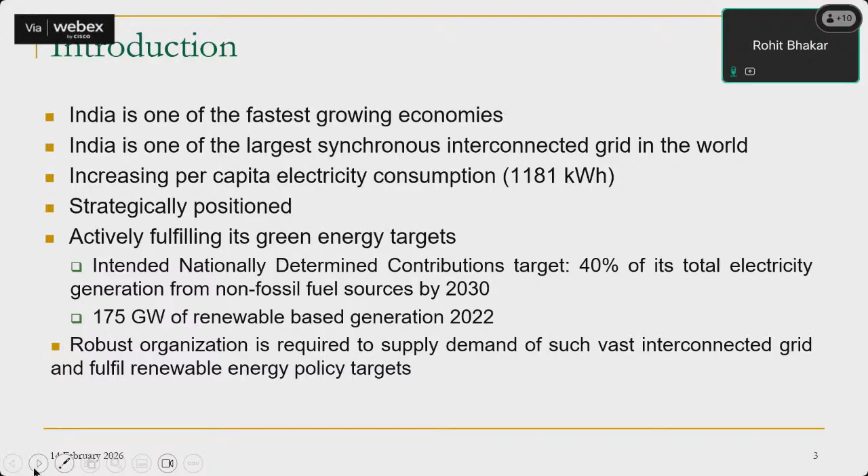The challenges that we see are because of the large size and because of the renewable penetration that we are pushing in, large requirement in the grid. There is a significant requirement to invest into the grid. Now the question is how to do it optimally. There are various ways. We could do it through appropriate market interventions, through appropriate investments into the system and through regulatory changes in the grid. So what we look forward to is just a quick glimpse of how the sector has picked up.

On the policy front, who all are the players? The central government, the Ministry of Power and Central Electricity Authority, handle the policy front, policy and planning as well. Apart from this, NITI Aayog is also part and parcel, attached to the central government. State governments do planning, a bit of policy making. On the regulation side, we have got regulatory bodies at the central level, CERC, and state levels, SERCs. On the generation side, we have got central generating stations like NTPC, NHPC, NPCIL, etc. There are mega power plants, state-level GenCos and independent power producers. A lot of those are there.

In transmission, Power Grid Corporation of India Limited is the transmission licensee at the central level. At the state level, they've got their own state transmission licensees. System operation is presently being handled by POSOCO or Grid India Limited, having entities like National Load Dispatch Center and Regional Load Dispatch Centers under its domain. At the state level, we have got the state load dispatch centers, which do the load dispatch and manage the control rooms for load dispatch.

On the distribution side, presently there are distribution licensees at the state level. The central government does not interfere much in the spectrum of distribution licensees. Trading licensees are there, those who participate in the market, and the appellate tribunal is there at the central level for appeals, not at the state level as of now. Having said that, this situation is evolving.

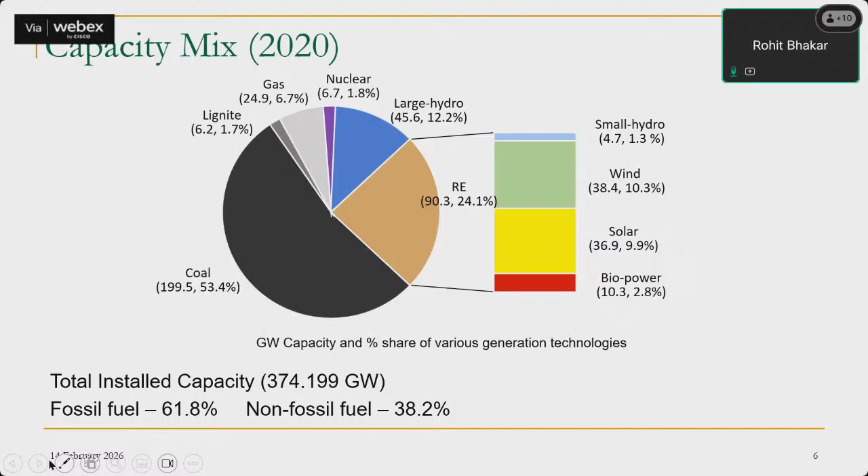Capacity mix is slightly dated, but if we go by the percentage, more or less it remains similar. RE penetration is increasing. This was slightly dated because we could not get complete details of the updated numbers. However, I'll skip this. These are slightly dated numbers.

Coming to the point, what are the challenges with RE growth? One of the key challenges that we see with renewable penetration is the relatively high investment costs involved. Obviously, when you're putting up solar generation plants, you need land. When you're putting up wind turbines, they are costly. Apart from those, one of the challenges is the present infrastructure does not have the capacity to evacuate that power when it is getting concentrated in certain areas like Western Rajasthan.

Another challenge is that these sources are intermittent, they are unreliable for secure power supply. Grid operation has to be more focused now. These are issues of major concern because monitoring and control requires a lot of effort in the present scheme of things, in which there are a large number of distributed generators in the system, so monitoring and control has to be enhanced.

The challenges that we see when we have variable renewable energy being supplied into the grid: these are non-synchronous generation systems, which requires us to focus on appropriate frequency and voltage responses in the system. Essentially, present mechanisms of frequency and voltage regulation were traditionally designed for thermal power plants, which were dominant in the grid. Now, these renewable generations are non-synchronous in nature.

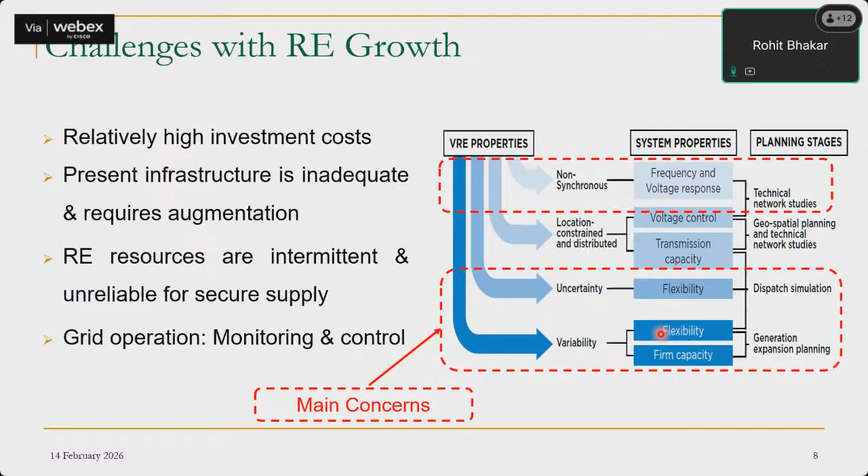So there are three facets that we'll be touching upon quickly in this session. One is on long-term system planning, the other one is on system operation, and third one is on transition towards future markets. How do we see all these issues? From system operation perspective, three issues are important as of now and are likely to be more important in the future as well. One is that of inertia and primary frequency response support in the grid. The other challenge is related to operational flexibility, and yet another challenge is related to operational reserves. These are the fundamental challenges that the grid is facing.

And some of the challenges have become significantly large, like operating reserves and operational flexibility. These two challenges have obviously become significantly large in the grid as of now, leading thereby to focus of the industry on resource adequacy studies over the last 2-3 years. So this is a segment which has drawn significant attraction in the industry.

Inertia and primary frequency response, this is yet to come up as a bigger challenge because the minimum level of operation of thermal power plants is still decent enough, and the grid is not facing challenges during those hours when the demand is there. What is happening is during the daytime when the peak demand is coming up, the solar generation is able to support it, so that compensates to a significant extent. So the challenges of inertial support are relatively low during the day hours. However, the challenges are coming up during the evening hours, but then thermal power plants and hydropower plants are able to support the grid. So presently the mix is decent.

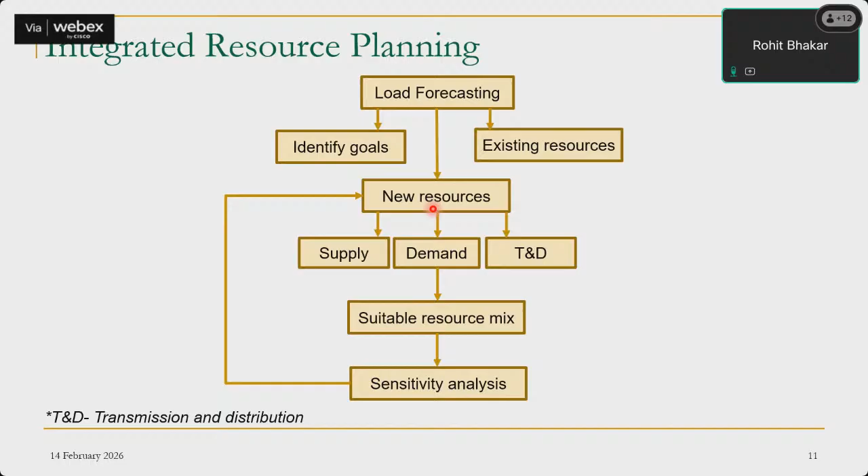terms of demand, in terms of transmission and distribution, and thereafter broadly identifying what should be the suitable resource mix that you would require to have a stable and secure system operation and planning. For that, we do a sensitivity analysis and identify which type of generation, which generation mix, which resource mix would be able to handle the system operation planning in a proper way.

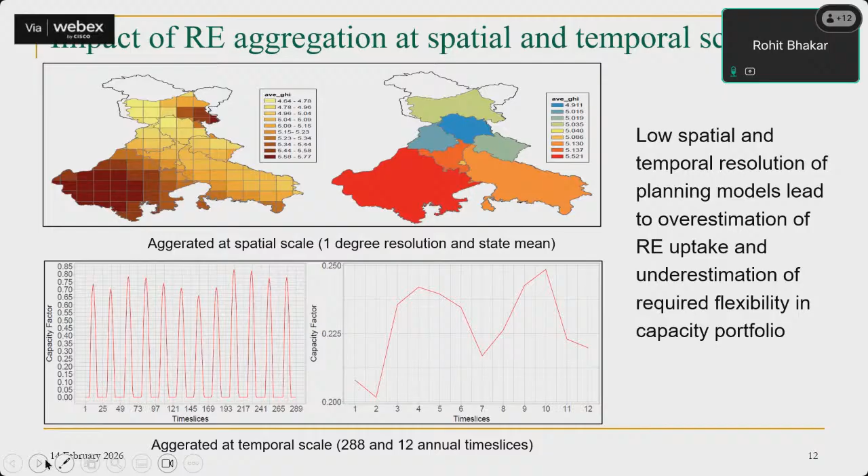From a long-term planning perspective, the challenges that we see presently, one of the broader problems that we face is when, in a very generalist mode, people say that these are the capacities of renewable generation that are coming up in the grid, we typically say the renewable generation is coming up 100 gigawatt, 150 gigawatt, 200 gigawatt. These are the terms that we generally use.

However, when we use these terms, we are not very clear on what is the time scale at which this generation is coming, what is the spatial distribution where all that generation is coming up in the grid. Until and unless we have a clarity of what is the time scale in which the generation is coming up, at what hours it is coming up and what hours it is not available, planning in the system becomes a challenge.

Until and unless we know the spatial resolution, where exactly this generation is coming up, we would not be able to make appropriate planning decisions in the system. This requires more understanding of geospatial capacities in the system so that appropriate geospatial planning of the system can be done.

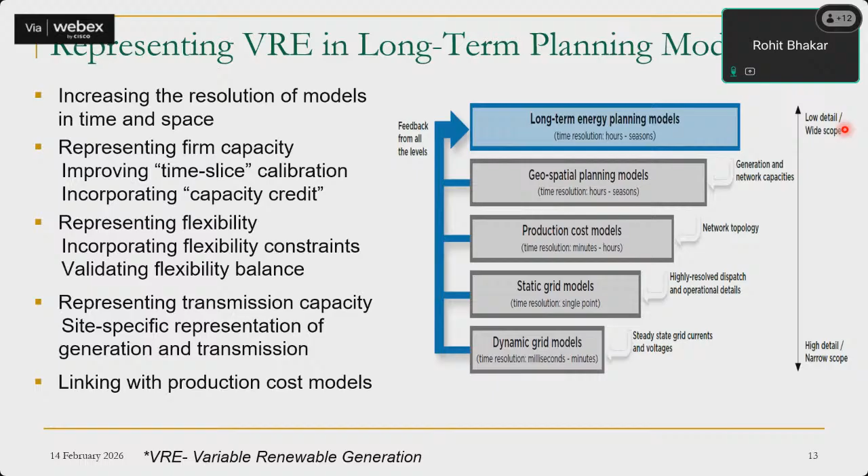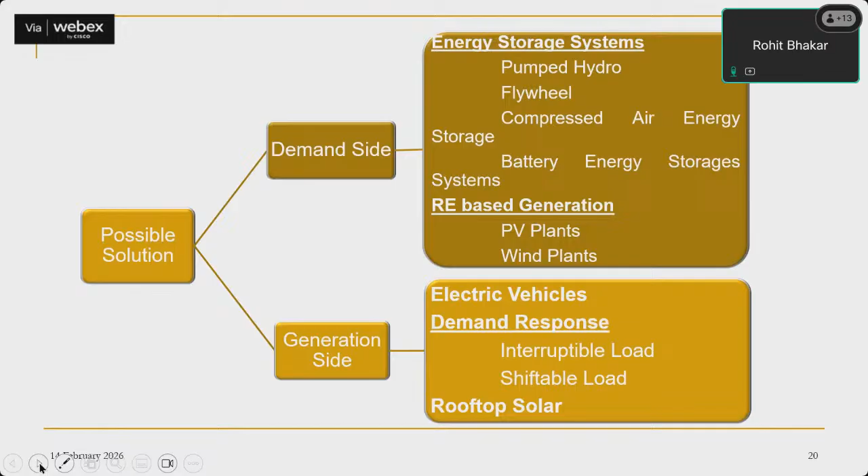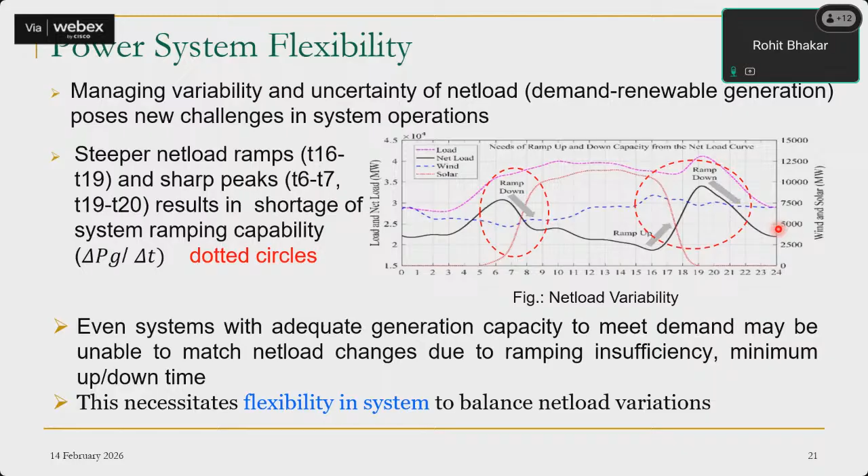Flexibility could be there in the shorter term time frame for optimal scheduling solutions, or from a long term planning perspective, in which appropriate generation mix and demand response mechanisms have to be put in place to provide those resources for flexibility. The types of flexibility that we would require would be in terms of capacities, ramping requirements, power capacity, energy capacity, and the delay in providing those services.

If the response delay is low, we presume that there is significant flexibility. If the capacities are high, we presume that there is flexibility. If the ramping limits are large enough, the generator is able to provide fast ramping up and ramping down, and we presume good flexibility. The same with capacities: whether a 100 megawatt or 200 megawatt power plant, a higher capacity indicates higher flexibility. If there is no flexibility, it would lead to renewable curtailment, load curtailment, or ramp insufficiency, which are measures of a non-flexible grid.

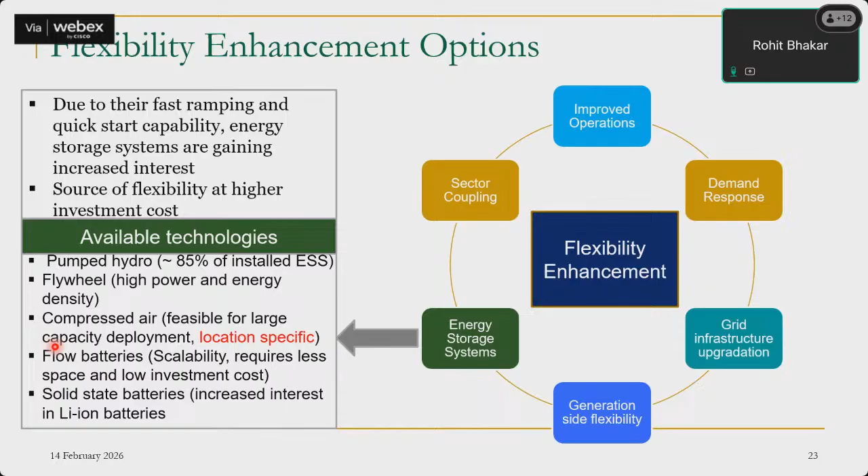So there are a variety of solutions to improve grid flexibility: energy storage, sector coupling, improved operation, demand response, grid investment, and generation side flexibility. On the energy storage side, we have pumped storage, flywheel, and other storage mechanisms. On the sector coupling side, we could bring in flexibility by integrating more electric vehicles, vehicle to grid and grid to vehicle, and hydrogen storage.

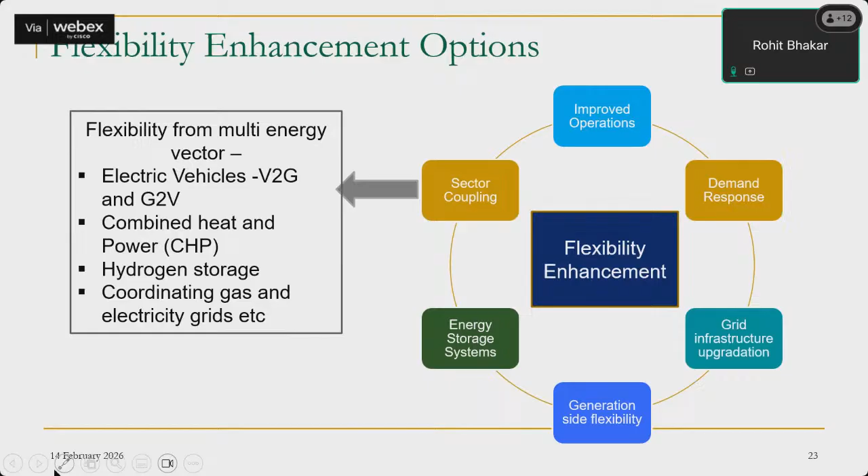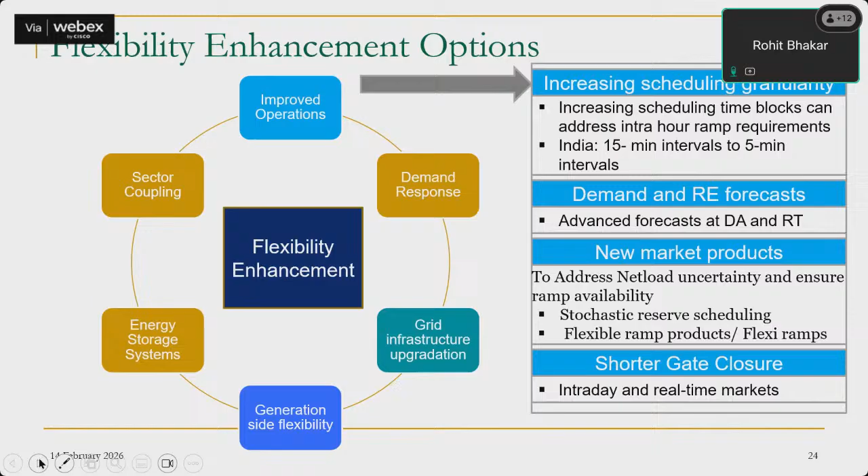These are some of the mechanisms coordinating electricity and gas networks. This could bring in sector coupling solutions, improved operations in terms of improving the time frame in which scheduling is done, having better demand and RE forecast, creating new market products like flexible ramp products and so on, having shorter gate closure for the markets. That is, rather than having a 4-hour market closure, we could do market trading in a shorter term time frame of maybe 3 hours to 2 hours, or even 1 hour for some of the services, if not all.

Demand response, which is one of the cheapest options, can be there to provide grid flexibility. The disadvantages obviously are the quantum of investment and the management required, but they are quite cheap, and it is a reliable source to provide grid flexibility. Investment obviously is a costly affair, but that is one that is presently being adopted in a big way.

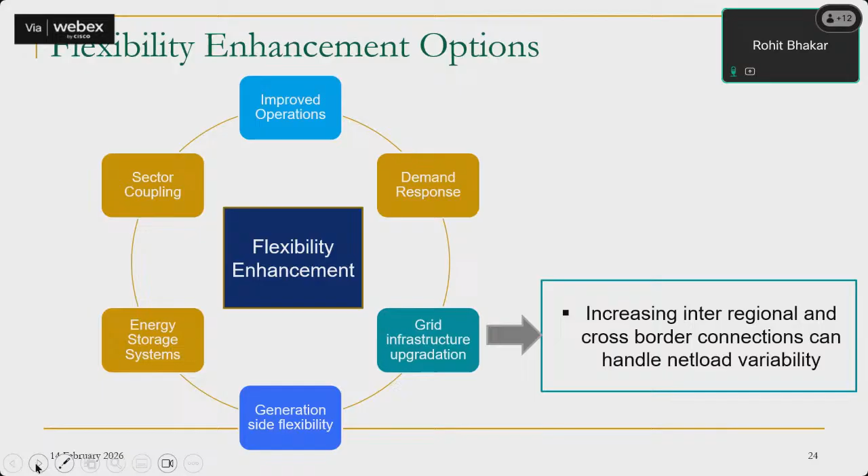Generation side flexibility can be brought in through increasing the ramping capability of units of thermal power plants, gas power, bringing in more gas power plants, decreasing the technical minimum, lowering down the minimum uptime and the downtime of the power plants, lowering of the startup and shutdown times. These could be some of the solutions to bring in more flexibility into the grid. Also bringing in gas power plants as fast response. Hydropower plants are presently what are providing fast start resources. However, gas power plants can also be brought in to bring in that type of flexibility.

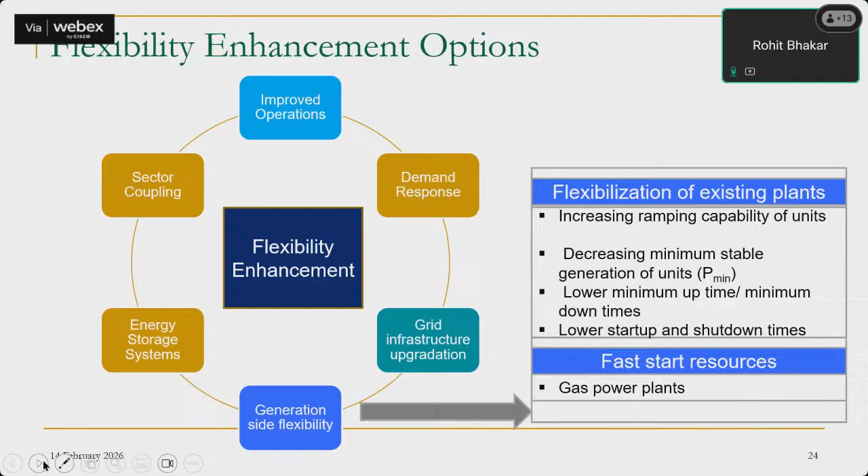Moving ahead from that, reserve scheduling is another facet that as system operators and planners we need to focus on. Because of high RE generation, reserve scheduling has to be resorted to, in which appropriate reserve planning has to be done in the grid, such that even in case of any variability, significant reserves are available in the system to manage the demand. This is obviously dependent upon good RE forecasting and uncertainty characterization of that RE generation.

The sources of uncertainty in the grid are a variety. They could come from the parametric uncertainties like forecast error, weather data error, historical data error. Temporal uncertainties could be because of data variation from one year to another year. The resources could vary. You could have a temporal uncertainty in what was the data available last year, what is the data available this year. Those types of uncertainties can creep into the system. Structural uncertainties, because we have a lack of simulations, we have lack of understanding of the detailed modeling of those power plants. Spatial uncertainties: the uncertainties may vary from one area to another area. Measurement uncertainties, which are dependent upon accuracy of the model data, which are dependent upon the type of sensors that we use and the calibration of those sensors.

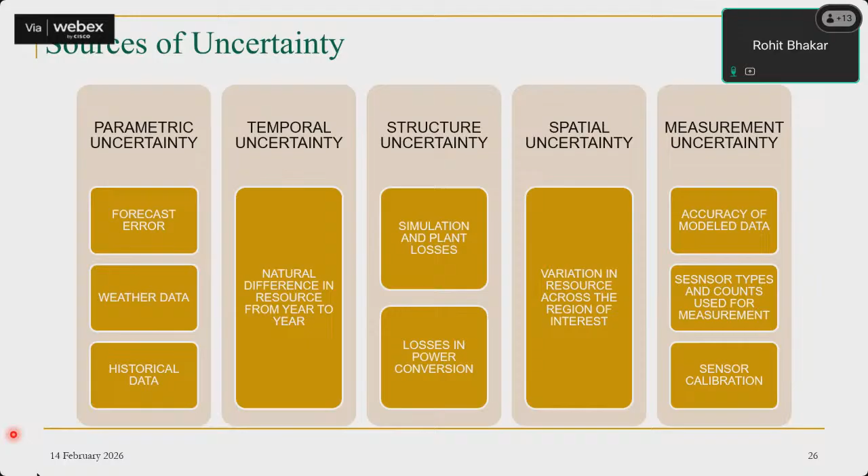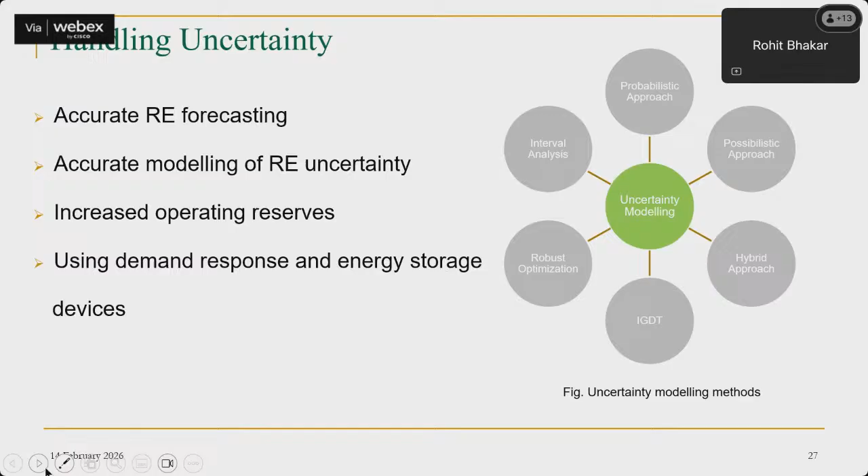Handling those uncertainties is obviously dependent upon accurate RE forecasting, modeling of RE uncertainties, and increasing the operating reserves. This is how you can handle the uncertainties, using demand response and energy storage. Energy storage is something that is presently being practiced. Demand response is something that would evolve in the near future.

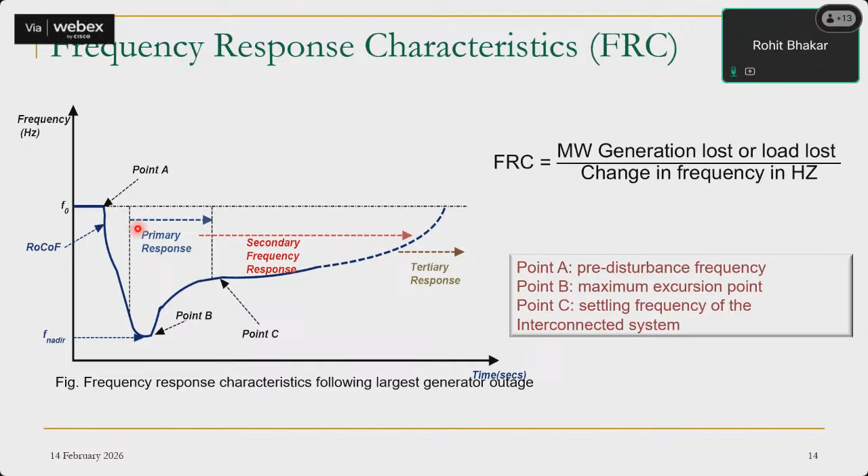So what does it mean by variation in frequencies over large time frames, like where the manual control is provided? No. The variation in frequency does not happen in a large time frame. Variation in frequency happens in a shorter term time frame. It has to be managed in a short term time frame, in this time frame of primary, secondary, and tertiary response. Maximum frequency variations can happen in this time frame.

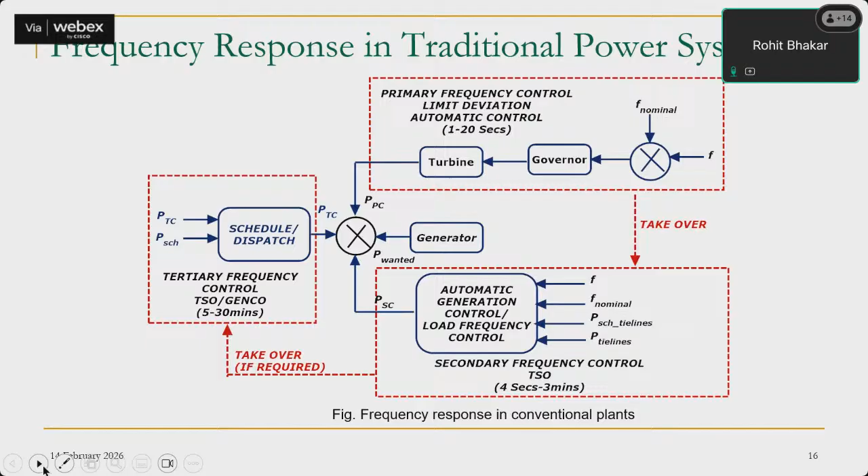However, what happens is as soon as the automatic generation control gets activated, the generation would be increased. Let's say if the frequency is going down, in that case, you would bring in additional generation through secondary control or through tertiary control or generation rescheduling. So if you get into this time frame of beyond 15 minutes, 60 minutes, obviously economic load dispatch decisions can be reworked. This is a slightly longer term time frame being indicated.

Even if you can bring in that response within 15 minutes, it is sufficient for the system. I'll show you that. Even in this time frame, it is sufficient to handle the grid variations. Frequency variations typically are arrested within this time frame, not more than 3 minutes. Beyond that, it is more about balancing the power rather than balancing the frequency. So frequency recovery typically happens within this time frame of 3 minutes or so. It does not go beyond that, usually.

Okay. You also mentioned the shifting proportions of our power generation from non-renewables to renewables. And you mentioned that inertial response is handled by the system itself when the majority of the power generation is provided by the thermal units. So in case this majority shifts to renewables, like solar and wind power generation, would there be a requirement for additional features or mechanisms in the system to address these three areas?

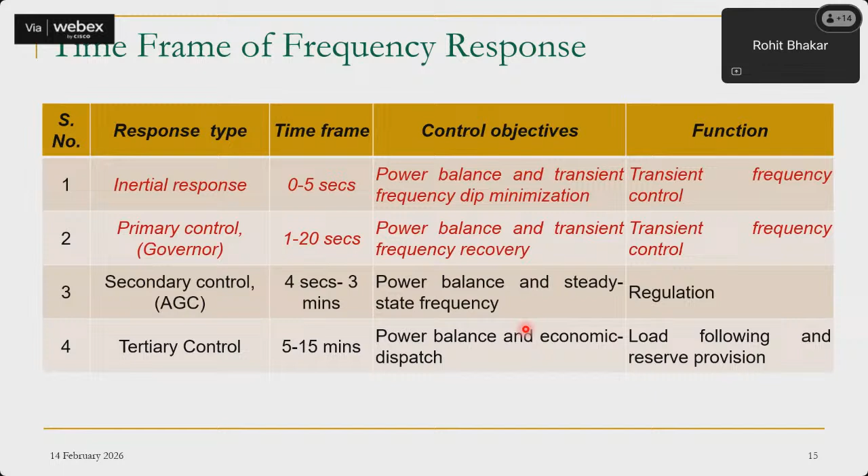I understand it was a slightly more sketchy presentation on moving from planning to operational perspective. We started a bit late and I thought of covering it in a quick fashion. However, I'll be happy to take up these points. If you want, I can respond over email or maybe in any other session. I'll be happy to answer those questions, more focused on planning studies and more focused on system operation studies, as and when required.

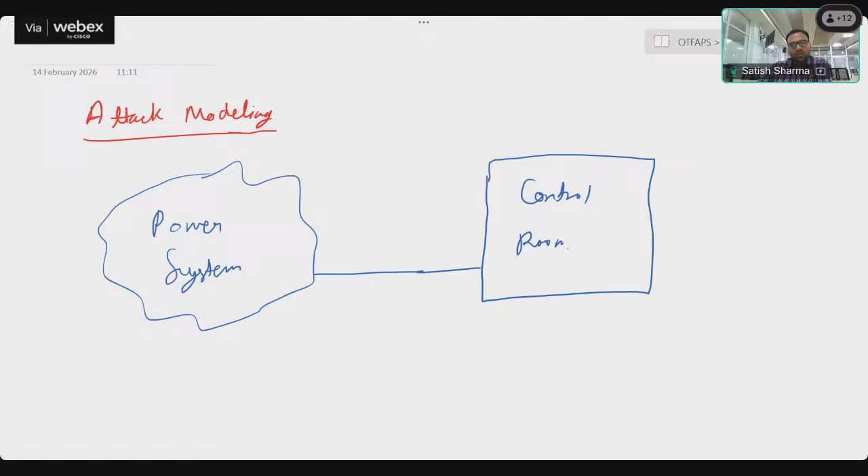So to understand some attack modeling, let's say we have a power system. In the power system we have the entire network, different loads, different generators. Some information is fed to our control room. The control room is continuously monitoring the entire power system, getting all the information from the physical power system, where it will run the system operation like dispatch related programs, and for a fault, what are the different system states. So all related information it will run.

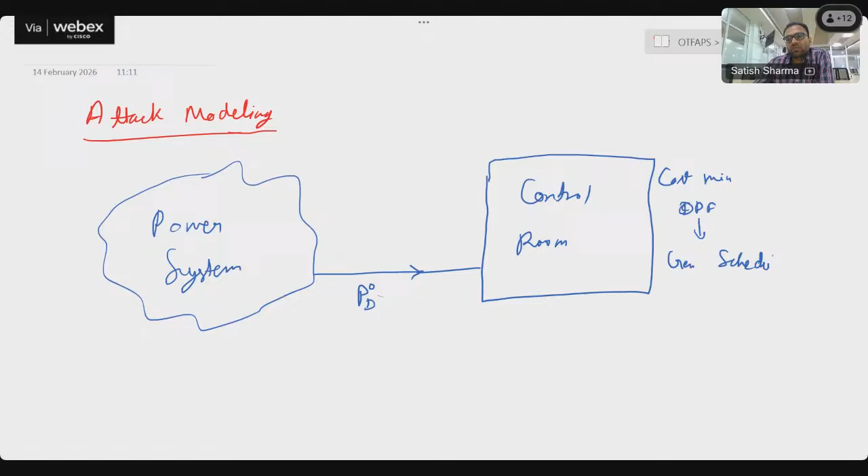So let's say I am assuming that certain demand is being observed from the power system, and in the control room we will perform some optimization, say cost minimization. It can be your economic load dispatch, or it can be your OPF. So that optimal power flow will be performed there, and you will get some generator schedule based upon whatever demand we have obtained.

So let's say PD0 is the real demand in the system, and by PD0 it does not mean total demand. It is basically the demand at each and every node. So that is PD0, and then all the different generators. We obtained a particular schedule with the help of our DCOPF or ACOPF, and we set those generators to the updated schedules. So this is the very simple schematic diagram.

Now if we talk about the attacker's point of view, there can be multiple objectives. The attacker can gather certain information, he can manipulate certain information, and there are many places where he can attack. So certain demand is observed in the system and sent over the communication channel to the control room. If an attacker comes in and modifies this demand, in the real system the demand is still PD0, but for the control room it has been falsified.

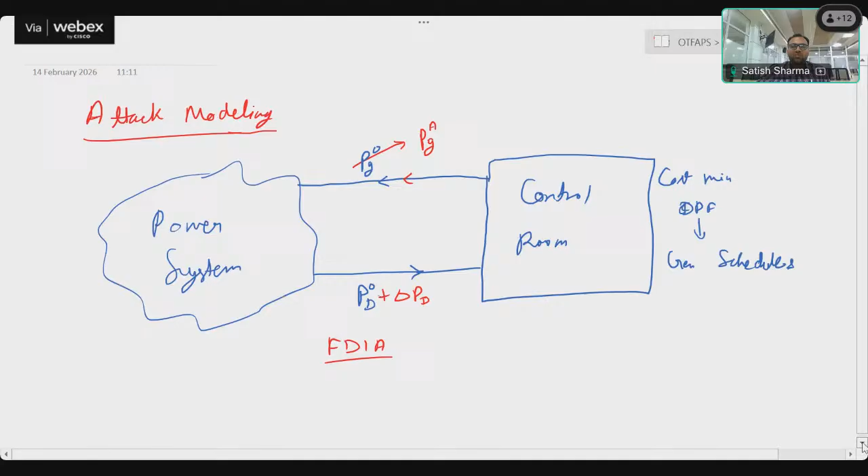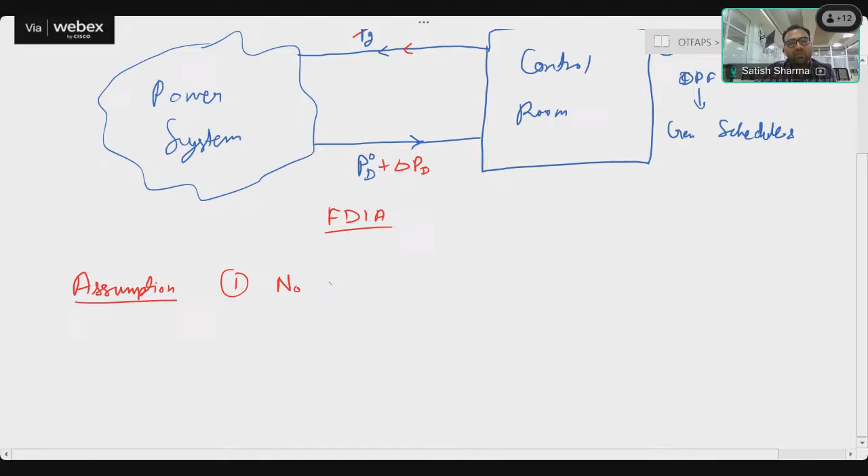So we will look at the mathematics of it, how one can design such an attack, and what information the attacker is going to need to create this kind of attack. So let's say I make certain assumptions. The first assumption, just to make these attacks a bit realistic, is that generators cannot be attacked, because generating stations are few compared to the loads. Loads are very large in number, and we generally protect our generating power plants. So we assume there can be no attack on generating stations, which is quite realistic.

Loads and line measurements are under attack. So that is another assumption, that the attacker can target load measurements and line measurements to design a particular attack. Then apart from that, to make this particular attack more realistic, another assumption is, it's not necessary, but

to be stealthy. The attacker has attacked the system; some manipulation of this particular demand has been done, and that manipulation is sent to the control room. The attack can be on the meter measuring the different loads, on the measurement units, or on the communication channel to manipulate the demand information. Now, let's say there is a load of 50 megawatts and the attacker changes it to 100 megawatts. But if it changes the load to a very large extent, obviously the control room also has its own bad data detection.

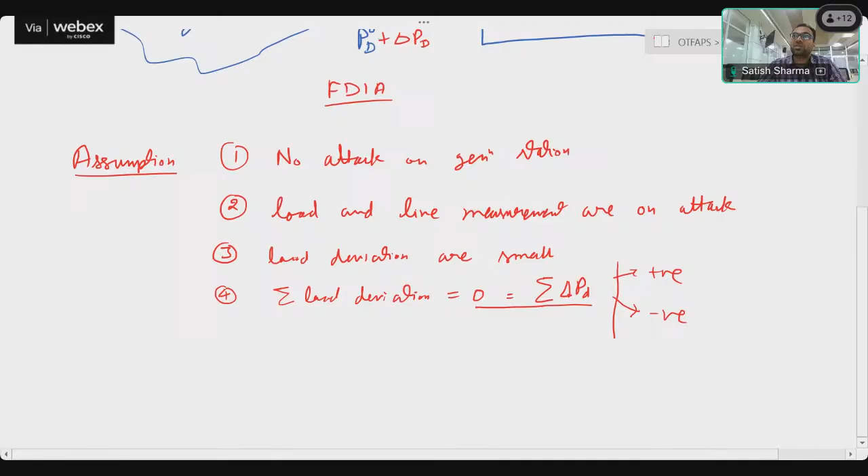So that's why this kind of attack, when the algebraic sum of the deviations is equal to 0, is called load redistribution. The attacker may increase one particular load by, let's say, 10 megawatt, and then he may decrease 3 or 4 loads to compensate that 10 megawatt. Okay, so the total deviation will remain 0. So we are basically redistributing the load, increasing one load and decreasing other loads. So these are load redistribution. If this condition is there, these attacks are also called LR attacks.

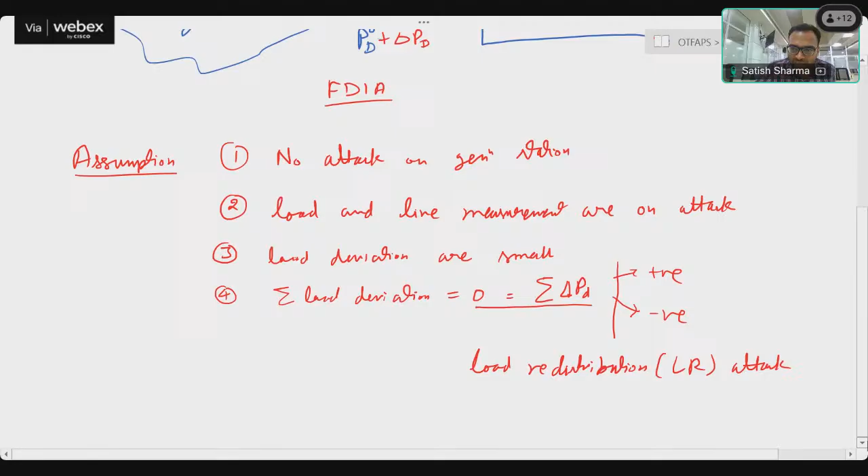Now if we look at the mathematics and how an attacker can create this kind of attack, first of all we have to look at the objective of the attacker. Okay, so what can be the attacker's objective here? Suppose he wants to attack a transmission system. The attacker can have multiple objectives. One of the objectives is to just gather information.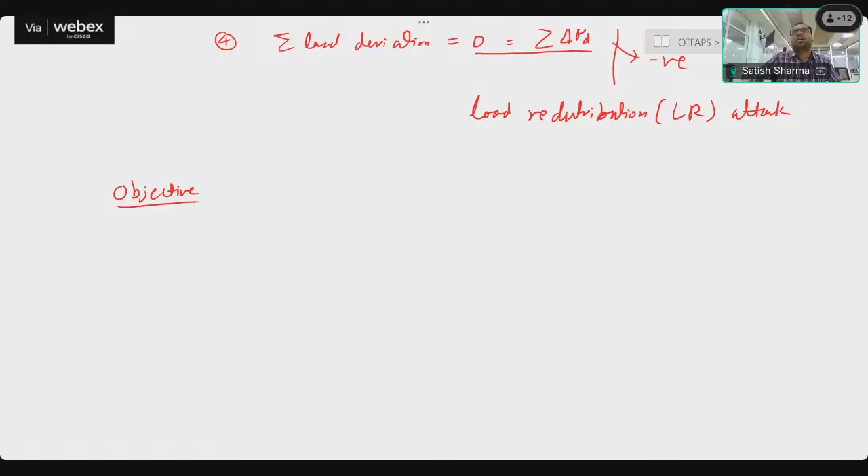So in that case he will send some spyware, and he will observe the consumption patterns and the different parameters. He will just observe everything, and he will do no harm to the system. Those kinds of attacks are generally called spyware attacks, just to gather the entire information. Once the entire information is gathered, then he will execute the real attack on the system to harm it. Then, who can these attackers be?

So let's say if we are talking about making some financial gain out of the system, the load itself can be the attacker. A load is there, and he is attacking or manipulating its measurements. So it may decrease its real consumption by increasing some other consumption, attacking the other meters of a neighboring load, to gain some financial benefit.

But if those kinds of attacks are realized, and if the deviations are very large, it's quite easy with state estimation and bad data detection techniques to identify that kind of attack, that this particular user is doing it.

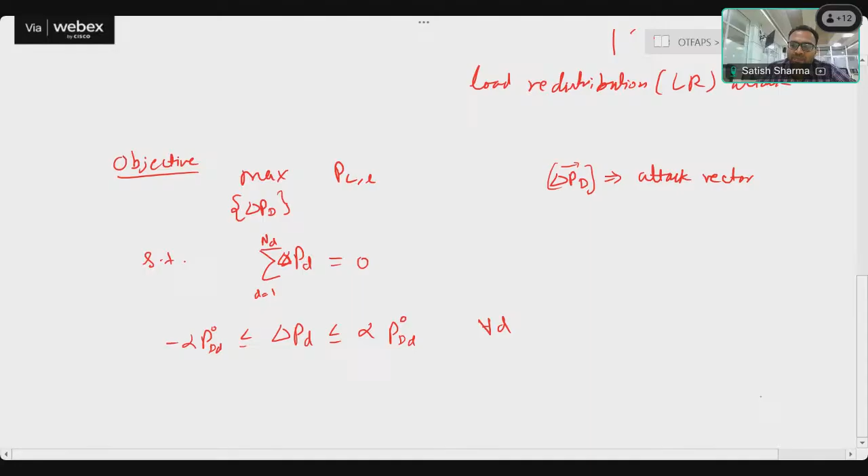So let's say once we have realized this particular kind of attack, that we have changed the load, that will change the line flow. So the line flows can be placed as the generation shift factor matrix multiplied with the power generation minus power demand. Okay, wait. This is the line flow. So this GSF is the generation shift factor.

It is defined as: if certain generation is injected at a particular node, how it is going to be distributed over all lines. So this factor gives you that. So here we are multiplying it with the generation, and that generation multiplied with the GSF factor will give you the line flows. At certain buses, generators are not there, load is there, so we can consider that the loads are negative injections and generation is positive injection.

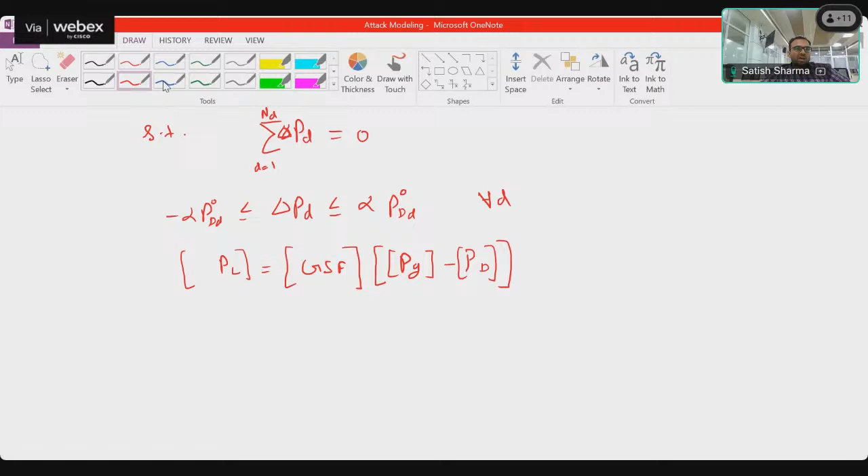So that's why I have placed it with the minus sign, that the loads are negative injections, and PG minus PD is the overall injection. And if I multiply with this GSF matrix, it will give me the line flows in the entire system. So once we have obtained this one, this is the initial power flow. So this is how we can calculate the power flow. Now I'm not going to use this particular constraint, so we will not use this one.

I can place a constant that change in load or line flow will be again some GSF matrix, and whatever change we have provided in the load. So this is what we will see, that what is the change in the load. If we are able to identify this change in the load, then multiplied with the GSF will give you the change in your system, or basically the line flows.

Okay, so these are basically one of the conditions: these are the line flows, and this change in line flow will basically be given to the... okay. Apart from that, we need this. So let's say some modified generation is coming in the system, some initial demand is present in the system, and then we have basically inserted some delta, so that is plus some delta PD that has been inserted, and if you multiply we will be able to calculate the actual line flow. So that is basically my PLL.

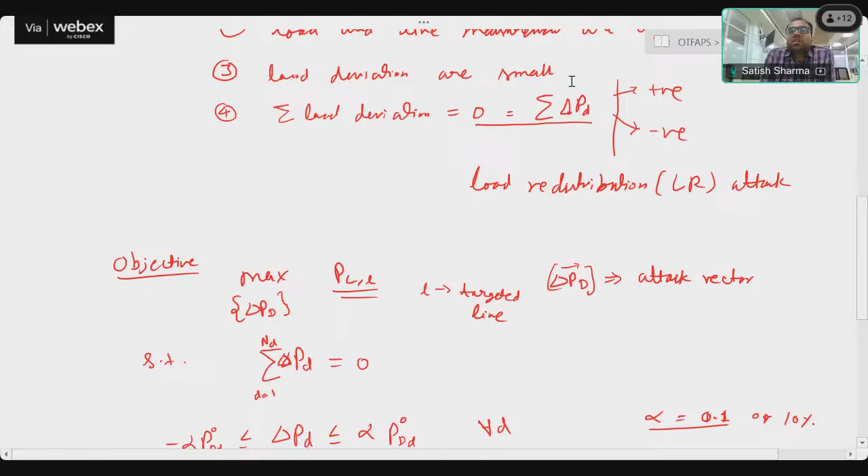So let's say if we assume that bad data detection cannot detect a 5% or 10% deviation, then we will use this alpha to decide whether the attack will be feasible or not. So from the attacker's point of view, we can do this. We can do this from the protection point of view as well: we can identify certain lines, target each line at a time and design our own attack as the system operator, and then we will know that these lines are very critical and the attacker can easily attack them by changing certain loads by, let's say, 2%, 3% or 5%. So from the protection point of view, we can identify which lines are critical and can be targeted with a very small deviation.

But from the attacker's point of view, the first line of defense is to analyze and model the attacker's behavior, like how the attacker will identify which attack he should inject. So the first line of defense is to model the attacker's behavior.

So this is what we are doing: the attacker is going to make a decision like this, that he will target a particular line, he will keep the deviations close to zero, so deviations very small. Overall resultant deviation, or the summation of the deviations, should be zero.

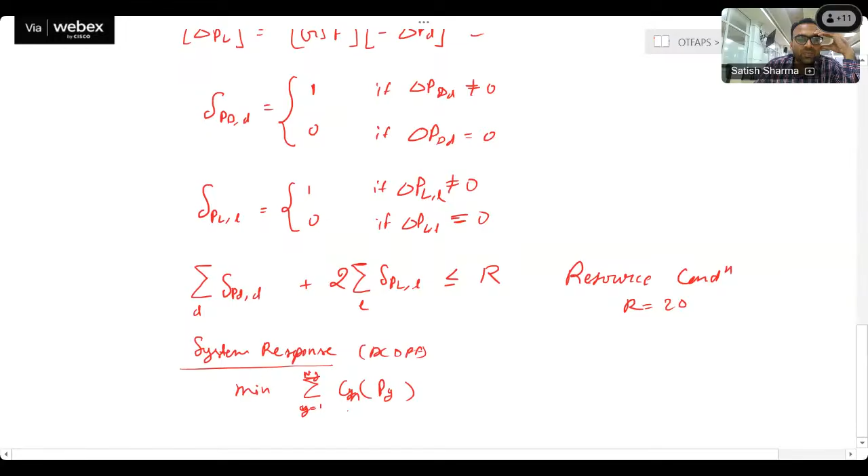Within this objective, one constraint will be the system response. So the attacker will basically model the system response as well. And system response is generally, we perform a DCOPF to schedule the generators. So I will put that constraint here: minimization of the sum over g equals 1 to ng of Cg times Pg. So this is the system response that it will solve post-attack.

The conditions here will be that our total generation, sum over g equals 1 to ng of Pg, should be equal to the total demand, sum over d equals 1 to nd. This demand has been manipulated. So this demand is basically the initial PD naught plus delta PD. So this is the total demand.

Apart from that, we have to calculate certain line flows. I will calculate the line flows from the system operator point of view. That will be the GSF matrix, and then this PG, which is the outcome of the optimization, the system operator will give you the generation dispatch PG minus

the PD naught should come here, plus some delta PD that has been inserted as well. So this will be the total power flow from the system operator point of view. Then

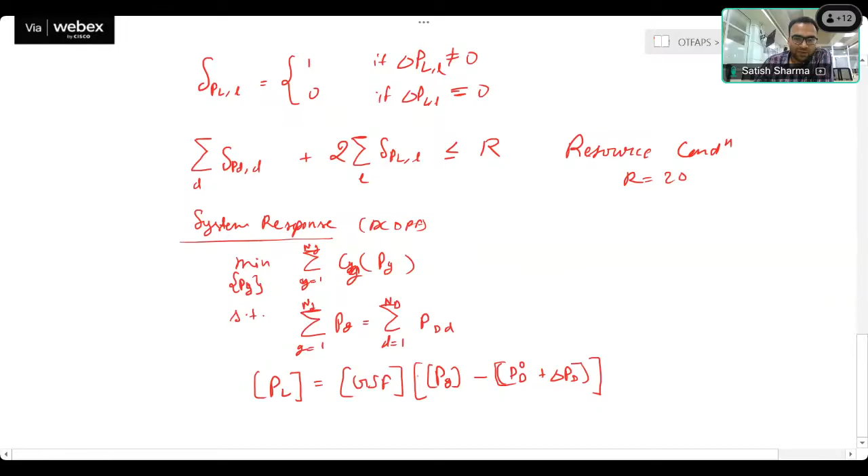further, if we see, is basically... Sir, what do the square brackets mean? It's a matrix. PL is not a single line, it's basically a set of lines. Yes. So I'm solving them in matrix form, and this PG matrix is basically generators at all the nodes.

If there is no generation, the respective value will be 0. Same goes with the demand. If certain demands are not there on a particular bus, that value will be 0. So we are writing it in a generalized way. These brackets are basically matrices; these are vectors, not a single entity. Here I have placed the individual demand.

So once we have obtained this one, we can write that this PL vector will have a certain maximum limit, PL maximum, and a certain minimum limit. What will be the minimum limit on the line flow? 0? No. Minus PL. Yes. So it will be the same maximum but with a negative sign.

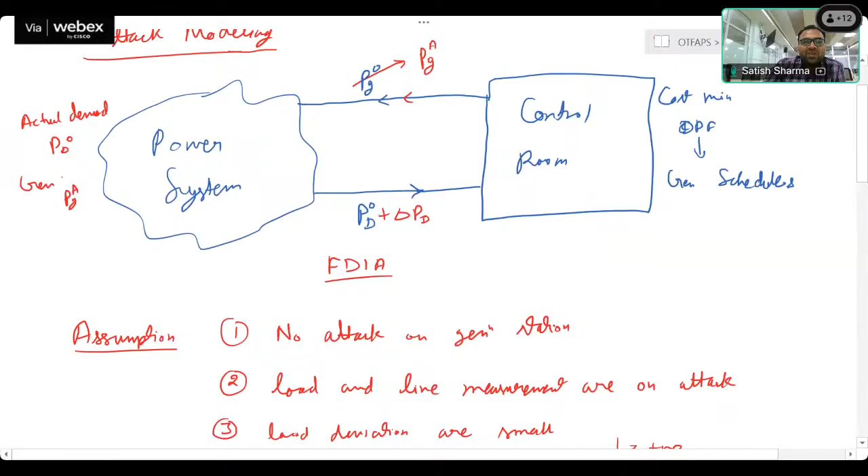So what I have mentioned here is actually not correct. So let me erase this part. It is not part of it. The power flow will be whatever is the attacked generation or falsified generation minus the demand itself only. Is this okay? So this is PD, and this is the actual line flows, and the rest of the things will remain the same.

So the thing is how to solve it. The very important part is how we can solve this kind of formulation. Basically one optimization is nested under another optimization. One is maximization of the line flow, and another is minimization of the cost. And the minimization of cost is nested under the maximization of the power flow. To solve this kind of nested problem, there can be multiple ways, and one is assuming certain values constant at each level.

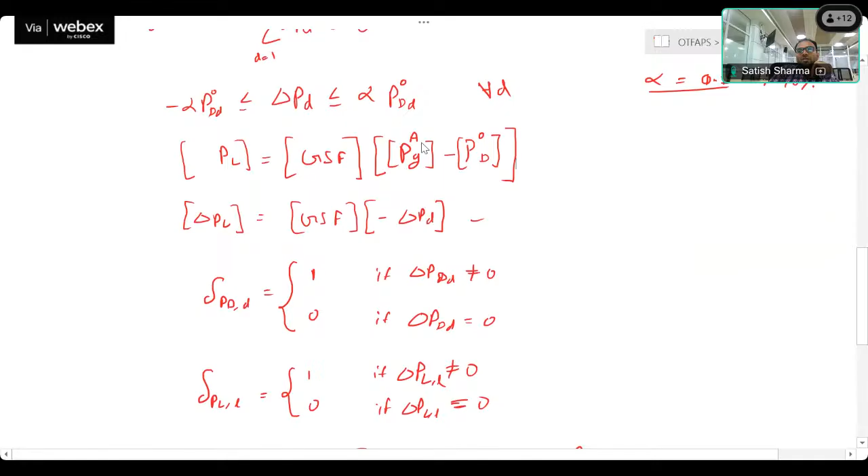At both levels we will assume whatever the coupling variables are. Here, this delta PD is the only variable which is going to be supplied from the upper level to the lower level. So if we assume a certain fixed value of delta PD, then we will get a certain attack PGA, and that PGA will be used here, and then we will obtain the new PDA, and back and forth we can solve it. So that is one way of doing it.

Another is we can write down the KKT conditions of this particular problem. For the DCOPF problem, we can write down the KKT conditions. The KKT conditions will provide the final solution. So write down the KKT conditions of this problem and place it with the first objective. That is another way of solving it.

Do you have any doubts on how to understand the mathematical model for the attack? I will not go much into detail. It's only two level. We have sometimes solved a third level as well, but I will not go into that. Sometimes the problems are tri-level. First the attacker will develop the attack vector. With that attack vector, he will calculate the modified generation. Once the generation has been modified, it will change the entire power flow, and in that case he has to look for the critical line which needs to be attacked, and then that information will be used to decide which line to attack.

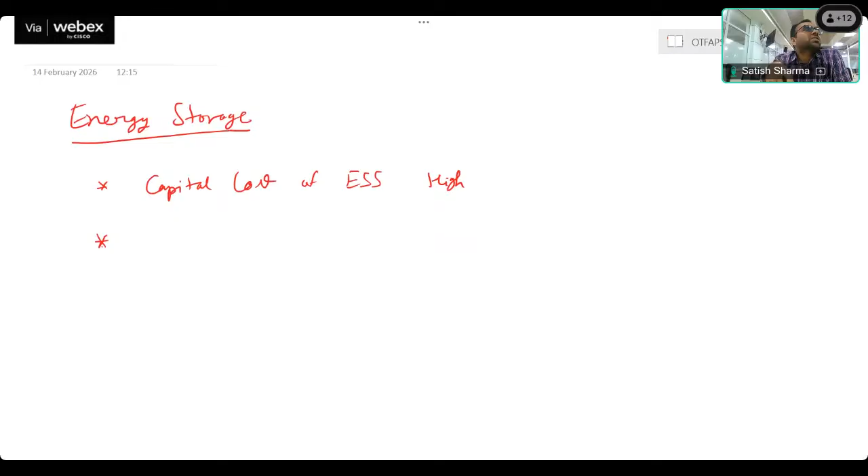And another way, we discussed that market based solution, where we discussed imbalance cost minimization. So he will try to come up with the expected schedule; if it is varying too much, then some penalties will be there. So to avoid those penalties, it will give a perfect dispatch, and that dispatch will try to cope with the variations. So that will be kind of an average value of the variation, so that it can handle the uncertainties. Another way is he can install a battery energy storage system.

So battery energy storage system has the balancing feature, so he can balance out the output of a variable producer. Correct. But we discussed that capital cost is very high. So today I can provide you an example. Let's say this is how we create the battery, right? So let's say a large energy storage is there. Okay, one more thing: for these individual participants, what is the utilization factor of the battery? How much do they utilize it?

Okay, let me ask you, do you have inverters? I think all of you have inverters at your houses. How much do we utilize them? What is the utilization factor of those batteries which are connected with our inverters? Very less. So we don't need that investment, because we are getting power continuously in the cities. So those inverters are not needed to a very large extent.

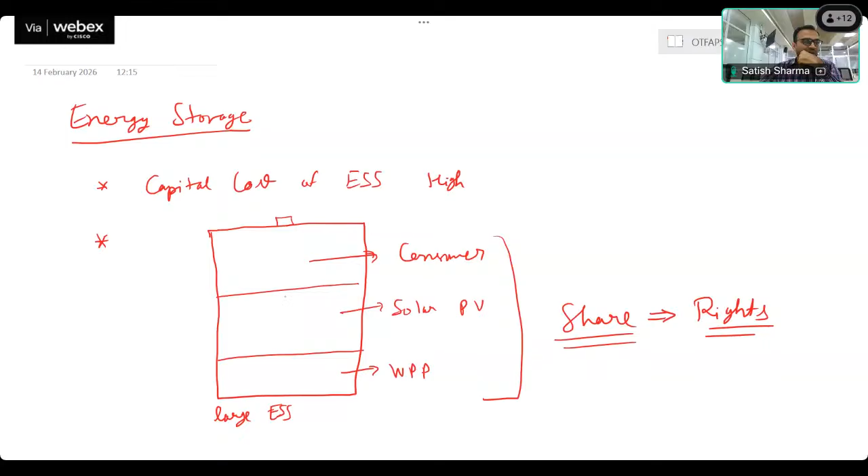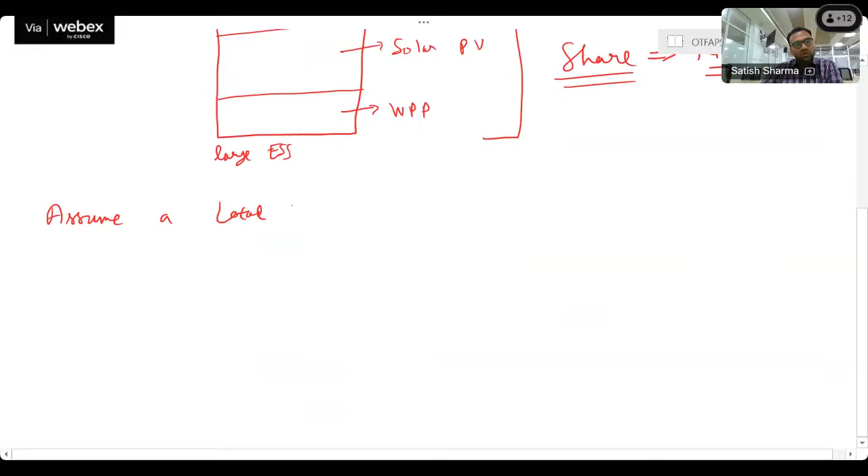Okay, so that sharing basically leads to the allocation of the rights: how much rights a person can acquire from the battery storage, and depending upon the needs he can get the rights. So let's see different players. Let's assume a local community.

Now to keep the entire problem generalized, not restricted to the wind or solar or the consumers, we are looking basically at market-driven solutions. So let's assume arbitrage is also there. If some battery storage is available for sharing, somebody can pay some price and access part of the storage, not the entire storage, at different time frames.

Then some aggregators may also come into the picture, and those aggregators will try to acquire certain battery. So what is an aggregator? An aggregator is basically an entity which makes a profit out of the price difference. They buy at cheaper prices and sell at higher prices.

Here, if battery storage is there, during the entire course of the time period, whenever the prices are low, the aggregator can ask the storage to store that much power for himself, and then he can sell it at the higher prices. So he can also make money out of this opportunity. So let's keep an aggregator as well, and we will discuss different participants.

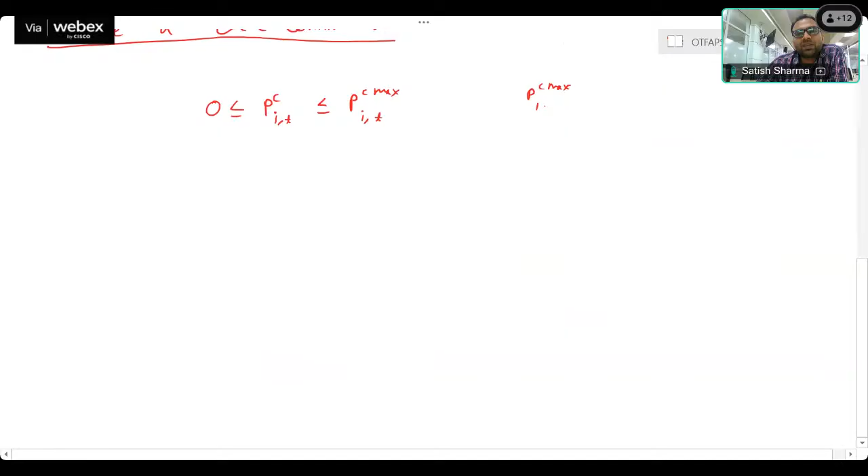PC max i,t is basically the charging right of player i at time t. And by player here I basically mean your wind producer, your PV, consumer, aggregator, and you can have a number of players.

So a player, depending upon its own requirement, irrespective of the system, can acquire certain charging rights: I'm going to charge the existing large storage for a particular time t. To charge the battery at time t, he has to acquire certain charging rights, and based upon the charging rights price, he will pay certain money: I'm paying you this much and you have to perform a charging action for me.

Let's say for a wind power producer, if he has some excess power, he can ask the energy storage to store the excess power the wind producer is producing. So he will acquire certain rights, let's say PC max. Similarly, whenever the power is less for a wind producer, he will need discharging rights, at some different time. Let's assume that is PD max i,t.

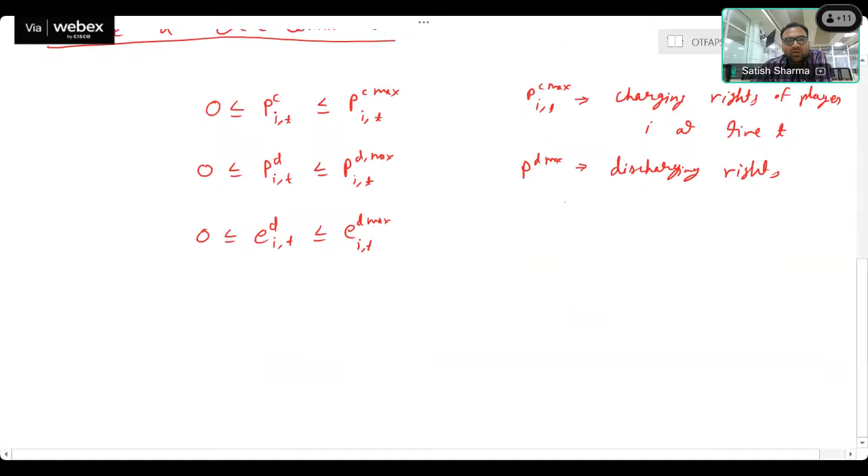The same can happen with energy as well. So E i,t should be less than or equal to E max i,t. Similarly, PD max is the discharging rights, and E max is the energy rights. Now the thing is, do I need three rights, or do I have to pay for three different rights?

What do you think? Should a player pay for three different rights? Swati? Gaurav?

Today, the right holder pays for charging, discharging, and energy rights, all three rights. So the thing is, let's say a lot of players ask for charging at the same time. The energy storage has certain physical limitations. It cannot provide it if, let's say, 10 or 20 players ask, okay, you have to charge for me at this particular time. If the overall charging requested is more than its charging rating, then it will deny it: okay, we cannot do it. So based upon whoever is paying more, charging rights will be given.

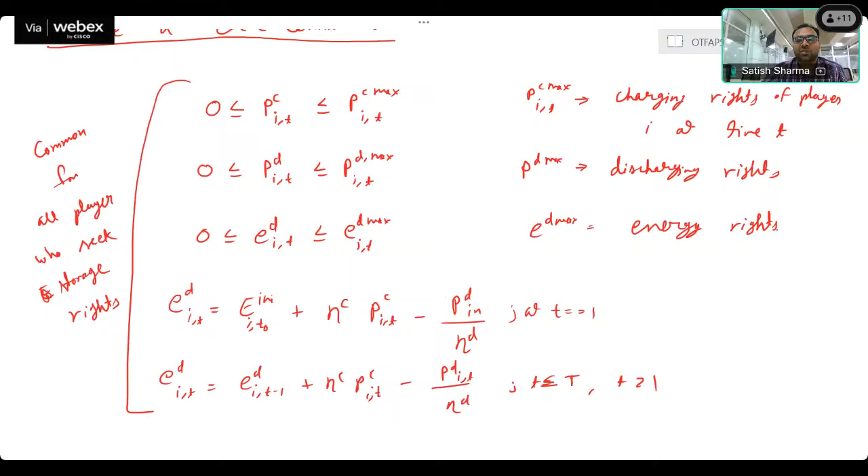Okay, so these are some constraints which are basically common for all the players, whoever is willing to acquire certain rights to use a large storage which is available in the system. Now, if an arbitrager is there, the objective of the arbitrager will be to maximize the profit, and the profit will be over all time periods.

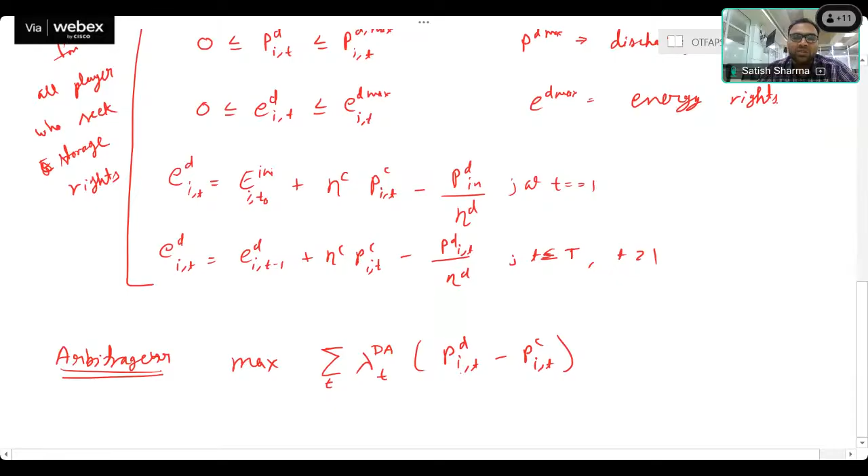It will have some, let's say, price in the day-ahead market, and then whatever it is discharging, and whatever it is charging from the system. So this particular part is the revenue. So I can put it like this. Okay, so this is nothing but the revenue minus the certain rights he has acquired. So those rights have to be paid. If he acquired certain rights from the energy storage, this will be paid.

Let's say a certain price is there for a particular time t, and this is the charging price at a particular time t. This price will decide how much the arbitrager needs. So this is how much he has to pay for the charging rights. Then similarly we can put PD max at t multiplied with the price of discharging at particular hour t, and ED max is the energy rights at a particular hour t, multiplied with pi e at time t. Is there any doubt so far?

Lambda DA is day-ahead price. Yes. So this is the day-ahead price, or some price at which the arbitrager is charging and discharging. You can assume it is the system price. So if an arbitrager is charging, he has to pay that particular price. In this case I have assumed it's a day-ahead price. It can be any price at which he is charging and discharging. Obviously PD and PC will not be possible at one time. Either he can charge or discharge, not both at the same time.

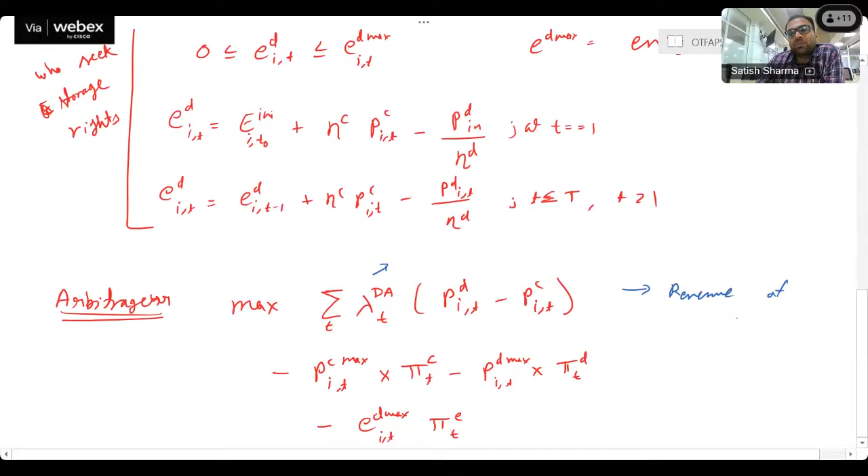These three terms are basically the cost paid to storage for rights. The storage will say, you are utilizing the charging, discharging, and energy rights or facility from me, so this much you have to pay me. So basically, the arbitrager will try to maximize the revenue and minimize the cost. That's why minus has been placed here. Is this clear? Subject to the common constraints.

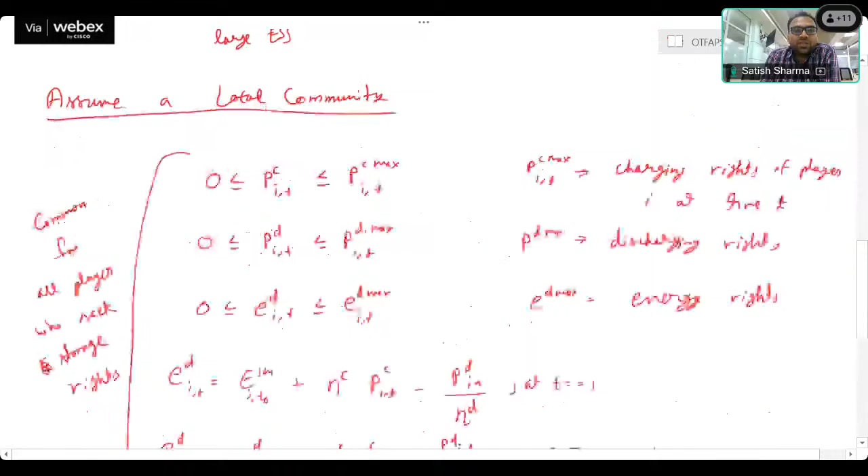Common constraints which we have defined earlier. So he will try to solve this particular objective function, and he will get the output. Now let's say the next is for the renewable.

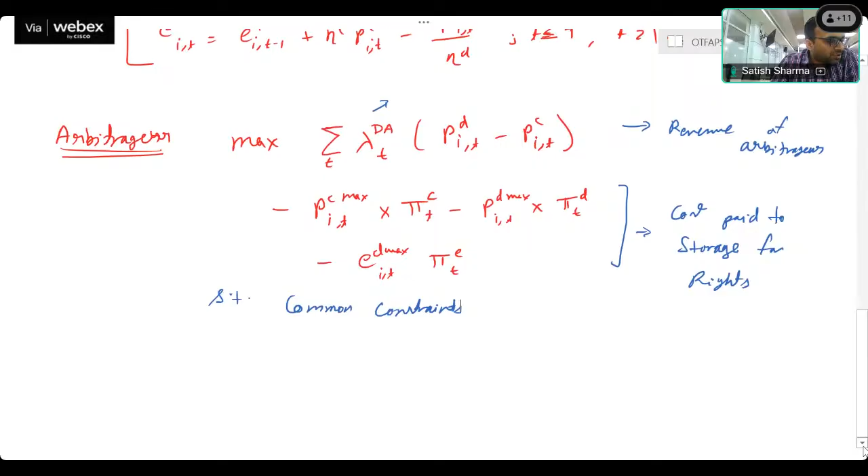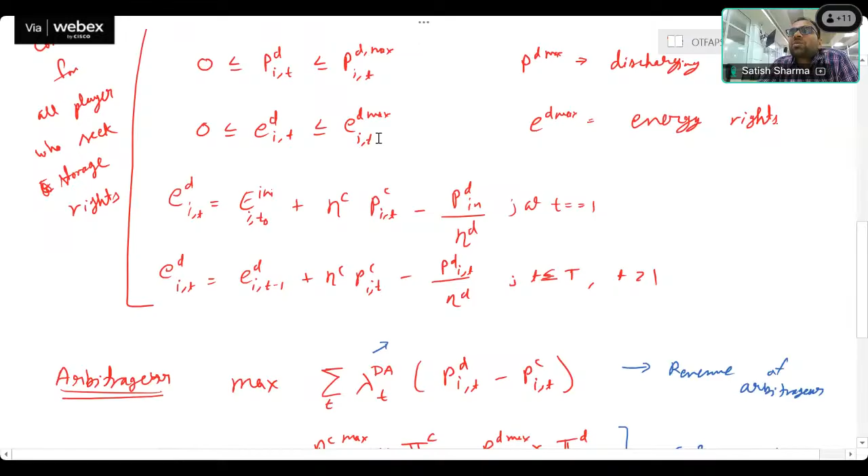The SOC constraints will be there? Yes, SOC constraints are there. You can see here, these constraints are already part of it. These are common constraints, so they will be placed here. The arbitrager will make sure that SOC is within the limit. He has acquired, let's say, this much maximum SOC. So because of the charging and discharging action, the energy or SOC should not exceed the maximum rights he has acquired at a particular time t. So the arbitrager will solve this particular objective.

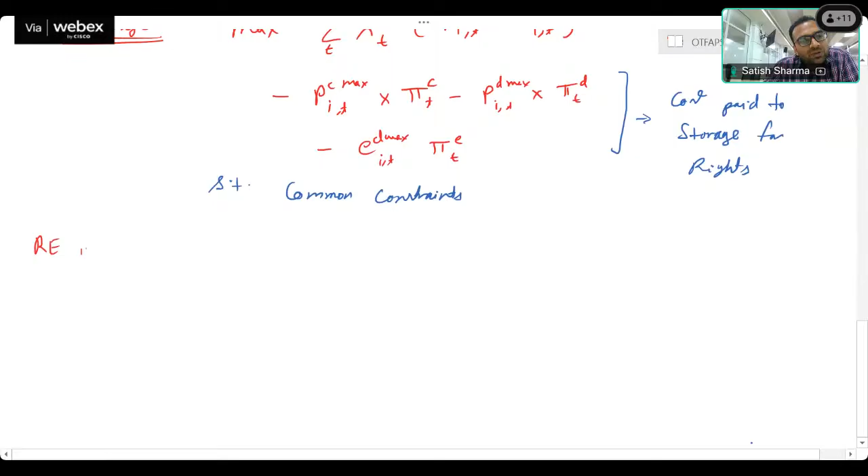Let's say if I look at the renewable producer, it will again maximize its profit, that is for sure. So maximize over all time t, let's assume the price is lambda DA at any time t, and he will produce some generation.

Let's say maybe the scenario is such that whatever wind is produced is close to its actual dispatch or schedule. In that case, whatever rights he has acquired are not useful, so he will also make money out of it. So let's say PG is the variable for how much power he is producing in real time, and he will get some money at time t, plus whatever he is discharging. So he gets money for producing some quantity directly as a producer, and for using the storage to produce for himself.

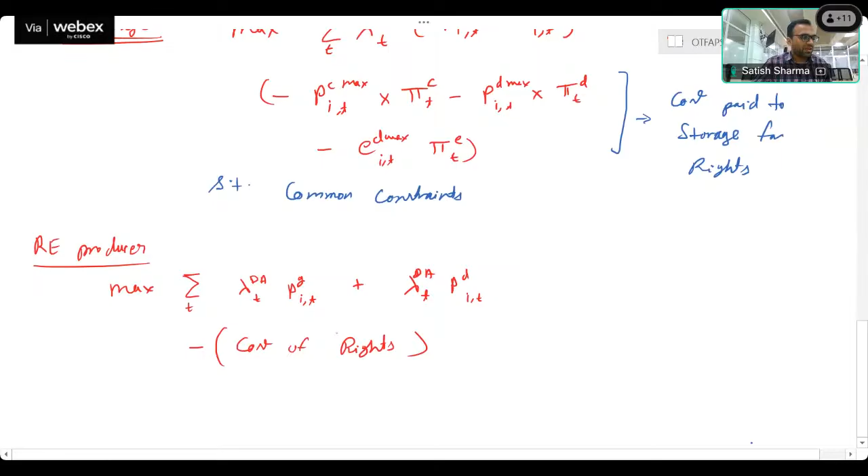Now minus, I will not write all of these, I will put cost of rights. It will be the same as this particular part. Cost of rights will be there, and then subject to the conditions it has to satisfy. He will solve this optimization subject to the common constraints we defined earlier. Apart from that, it will have one more constraint: this PG, how much it is going to produce, will be less than some day-ahead schedule, minus some PC hat. So look at this particular equation, let me change the color.

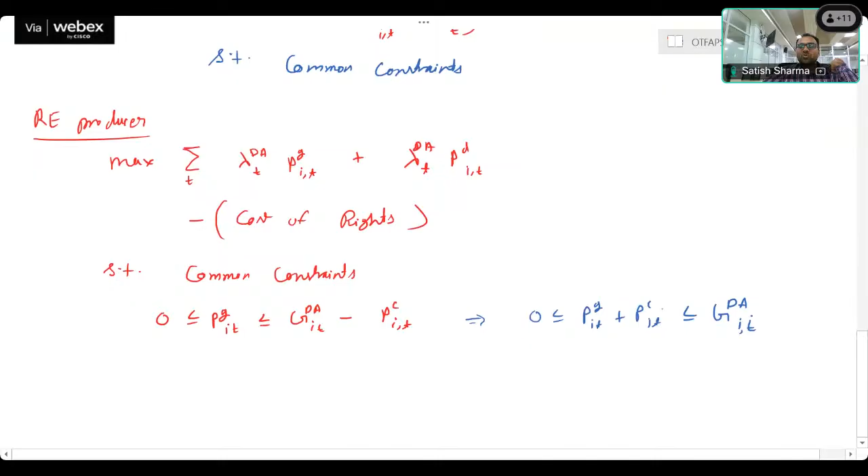Let's say this was the final dispatch, this much it is producing. So he will sell some power in the market. It means that PGIT plus PCIT is produced out of the total available production. This part it is directly selling into the market, and this part, PC, is used to charge. PG is the obligation: he had a certain dispatch and he is going to stick to it. If the total production is more than that, the excess power will be used to charge. If this power is less, it is not going to charge, so this part becomes zero, it supplies what it can, and the remaining will be discharged from the storage.

So if he has to produce something, the production will be PG plus PD. If the dispatch is less, he will utilize the extra power to charge. Whenever the dispatch is more and he is producing less, he will use PG to the full extent, whatever is capital G, and the extra power will be supplied by PD, the discharge. So this constraint is the extra constraint, plus the common constraints. The producer will try to solve this particular problem. Is this clear?

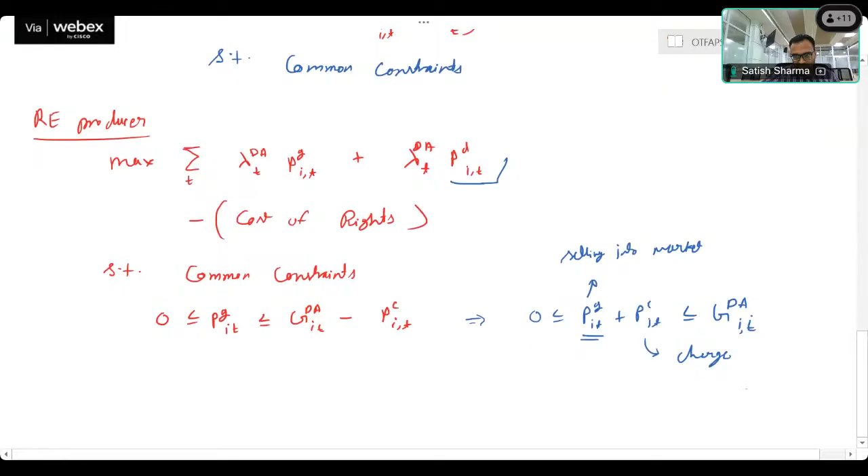This is the dispatch. So this is T1, T2, T3, T4 and T5, and these values are the dispatch, how much the producer should produce. Different levels are there, time versus dispatch. Now let's say the actual realized power is more than that. The power for this producer is PGIT plus PDIT minus PCIT. So this is the PW.

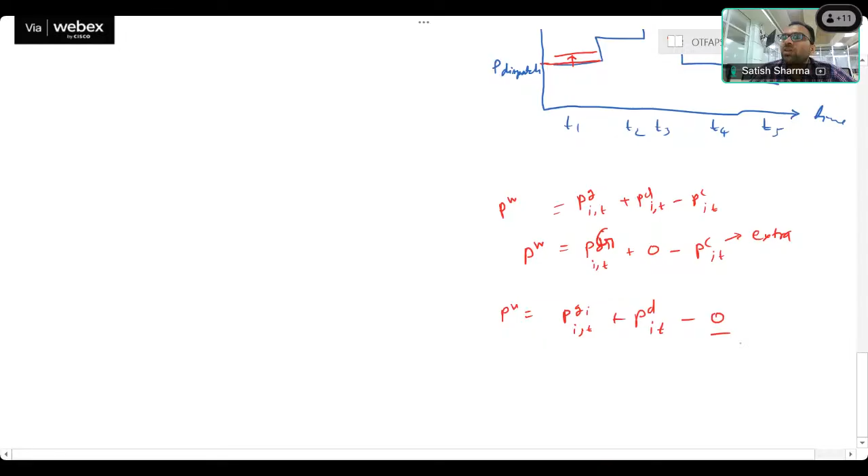Whenever there is less power, then at that time it will only discharge and there will be no charging action, it will discharge. So you can see here, by looking at this particular constraint and this objective part, if he has some extra power, so he has total dispatch of something, let's say 100. So the actual production is 100 and dispatch is, let's say, 90 only. Okay, PG should be 90.

Right? A generator, let's assume, has an actual production of 100 megawatt or 100 units, and the dispatch is, it should produce only 90 units. So it has 10 extra units which he can use. So this PG minus 10 will give you the 90. So at that time he will try to produce between 0 to 90. Now this PG will be decided by the price as well, whether he wants to charge more or less.

If this price is low at that time, he will increase the PC value as well, and this will give the outcome of what should be the dispatch. The same problem which we discussed earlier, that we don't stick to the dispatch. We are performing this self scheduling to identify what should be the dispatch. So we will solve this dispatch in such a way that we are performing some certain charging action.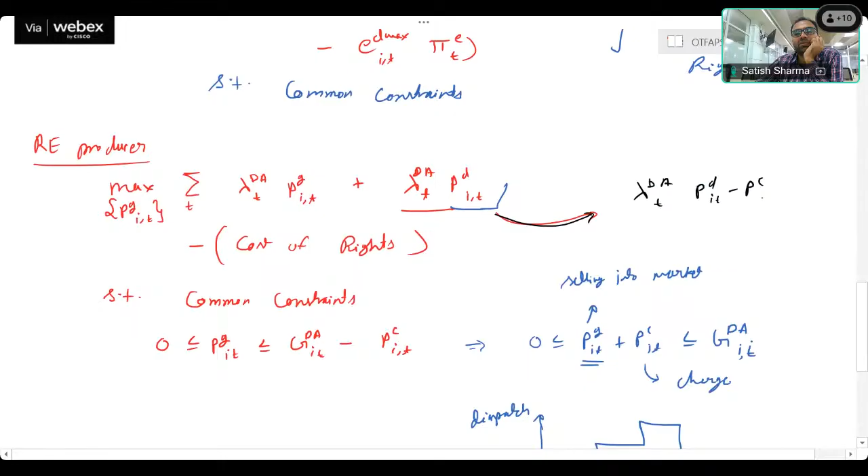So this is one of the objectives, or I can frame it the other way around as well. If I frame it like this, instead of this particular term, let me change the colors, I can use something else as well, like lambda DAT times PDIT minus PCIT. If I use this term as part of the objective function, then I can get rid of this as well. We can remove this one, that my PG should be within the limits.

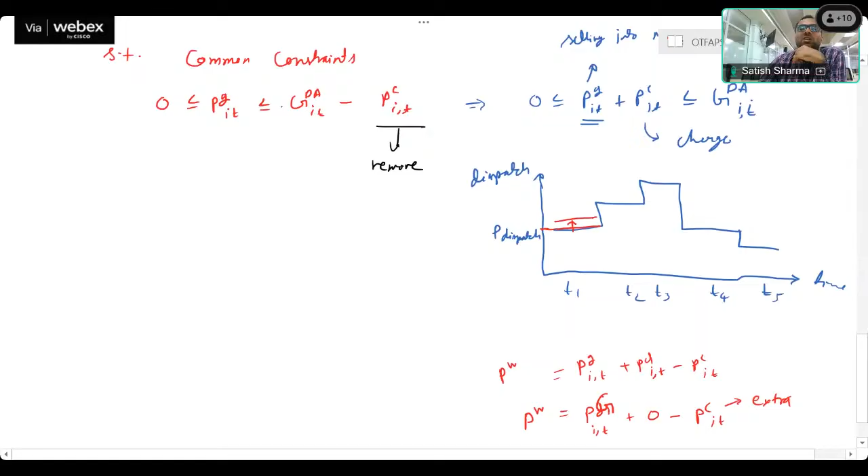And that part we have discussed in our renewable modeling as well, when we discussed how a renewable producer should decide by minimizing the imbalance cost. So this PG should be whatever is the P max available, so it will be between that value to avoid any penalties. So that part is driven by the market price, and we will remove this PC part from here. So putting the PC here dictates that excess energy will go for the charging.

If I remove this, then the objective function will look like this, that the PC is coming from the market price and PD is again selling at the market price. So it is an arbitrage kind of function. But if I put this PC here, it specifically dictates the optimization that I will only charge whenever there is excess energy. Okay, so this is the only difference.

Otherwise, you can replace these two terms. So either you remove this one and replace it with this particular term, that is also perfectly fine. Both will give you similar kinds of results. Okay.

So let's say these two types of players are there. You can model for the consumer and prosumer as well. For the time being, the prosumer has solar in the production, so that can also be used. Now, what will be the objective of storage?

Because we have storage here, the storage owner will also have an objective, and it will try to maximize the money he is getting. And how much money is he getting? Over all time periods, it is basically getting money for charging rights. So, okay, yeah, selling three types of rights.

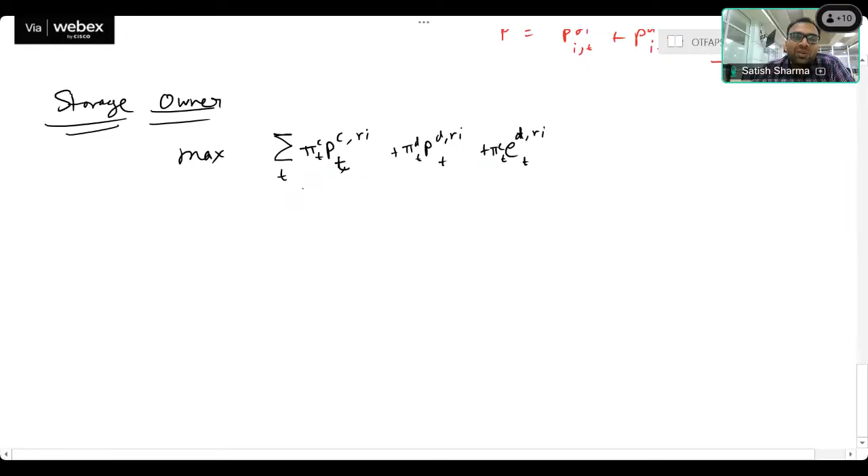One is PC rights, let's say, to the ith player at a time t, plus PD rights at a time t, plus ED rights at a time t. So we will try to maximize these, and these rights will be at the price of pi CT, the price of discharging at time t, and the price of energy rights at time t. So we will try to maximize this objective function.

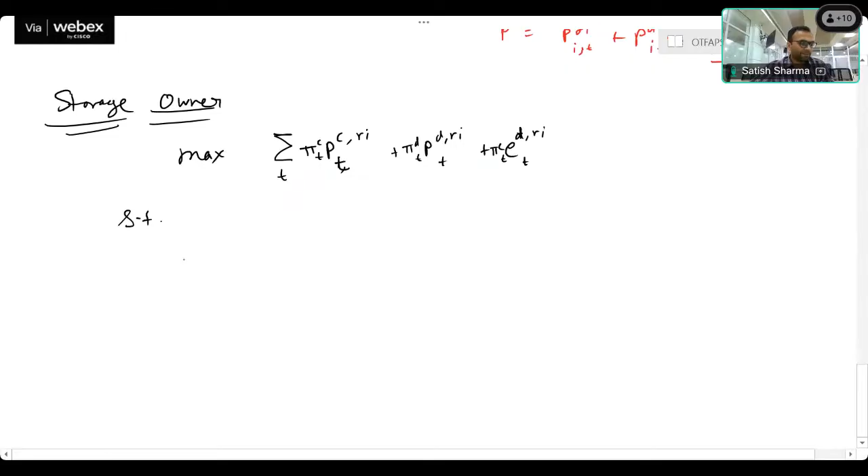Now he has provided rights to different players. So what were those rights basically? We have defined here in a common constraint that this PC max IT is the rights provided to any ith player. Okay, so we have, let's say, different players. So the total summation of these players, summation over I, and we have considered arbitrager, we have considered wind producer. Similarly for PV as well. So those kinds of players.

So we will use some PC max, that these are the rights provided to any player. So this summation should be equal to the total rights supplied by any storage at any time t. So this will be the total rights provided, the total charging rights. So we will sum over individual rights, that these many rights have been supplied to different players, and the total summation will be the PCRI. Okay, so this is the total charging rights provided.

Now, what should be this charging rights? Can he provide a very large value? No, these charging rights should be restricted as well. But these rights are in terms of power? Yes, so I'm assuming T equals 1. So yes, rights are in terms of power, like at a time, this much power you can charge. If I'm assuming T is 1, each time block is 1 hour, then P and E can be replaced basically.

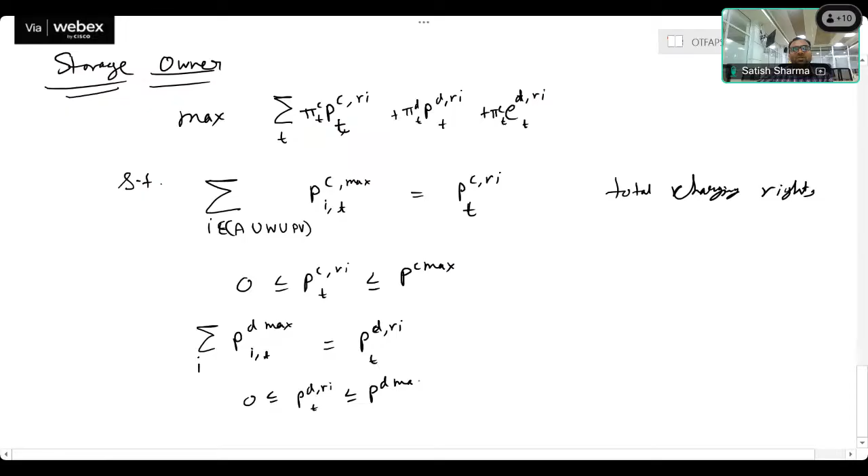Similarly, we can define that over I, I will calculate how many rights have been provided to the different players, and that will be the total rights provided by the storage S, and this right should be less than the overall capacity of the storage. Same goes for the energy rights as well. So these conditions have to be satisfied, that he cannot sell more than its rated capacity. Whatever rights the storage provides should be bounded by its actual physical limitations. Is this clear so far?

Yes, sir. Sir, are the voltage levels different for EV chargers in the charging infrastructure? Yeah, obviously, with the different voltage levels and current levels, there are fast and slow chargers, right? No, the charging terminals are different. Are they standardized? I'm not able to get your question. Basically I want to know, sir, whether the charging terminals available for EVs are standardized to a certain voltage or are they different? Generally, they should be standardized. Let me ask you one thing. Can I use my phone's charger to charge another phone?

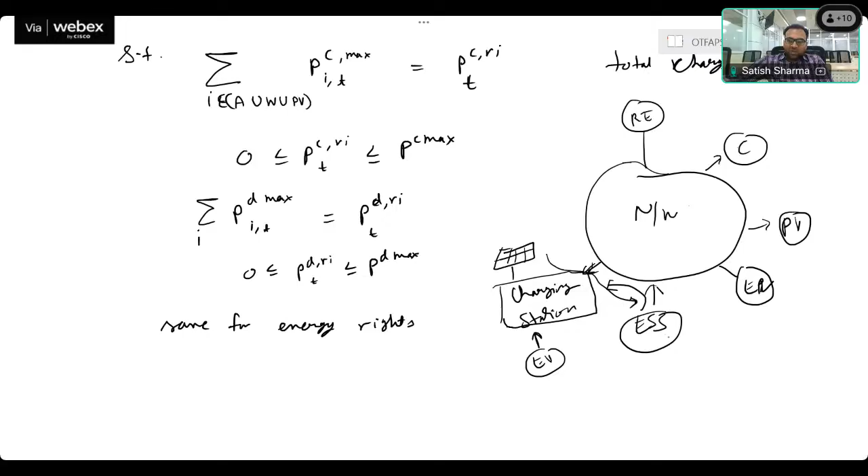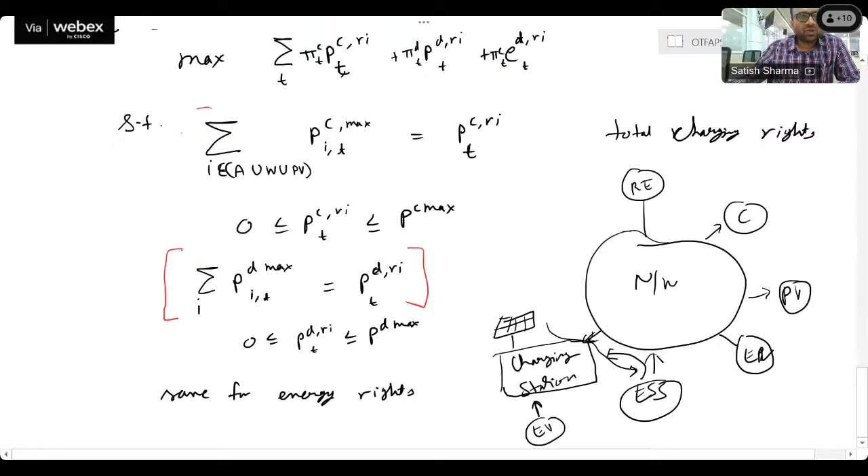So how can we solve this particular problem? There are multiple players. They all are looking for different objectives, and they are coupled with this particular constraint. These equations are coupling all of the above formulation, and the same for the rights for energy as well. Let me put it here. So these constraints are coupling all the objective functions, otherwise they are separate, right?

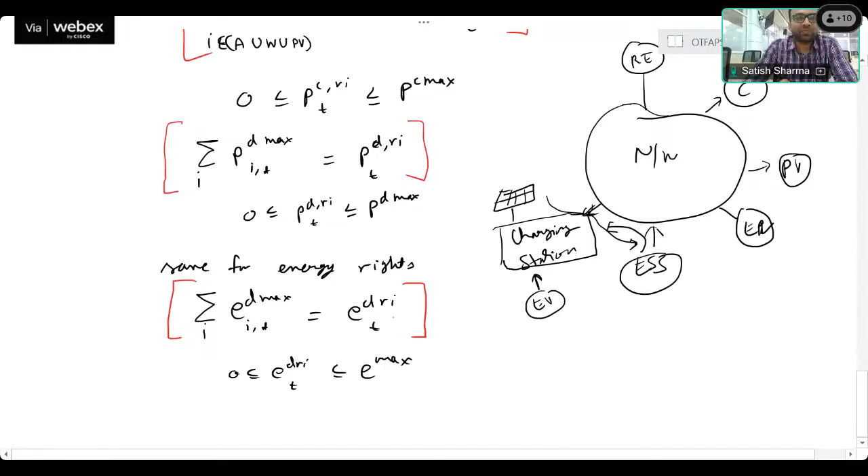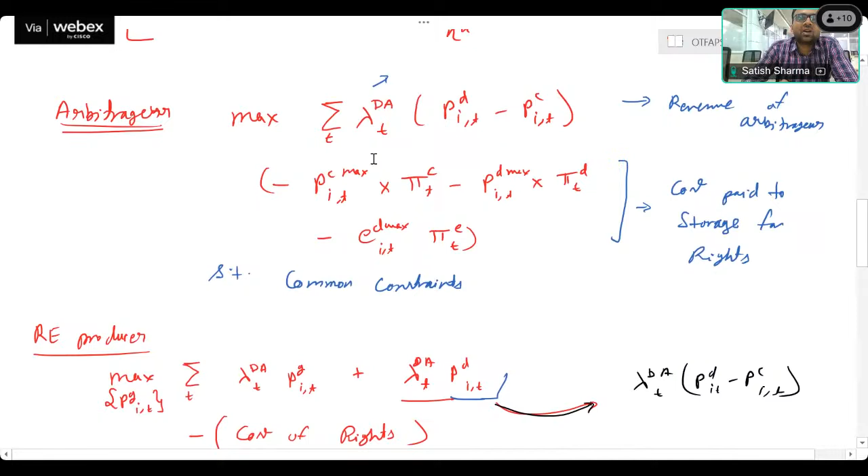These three constraints, which define how much rights have been provided by the storage, are coupling all of these different objectives. Otherwise the renewable producer will not affect the outcome of the arbitrager, and the arbitrager will not affect the outcome of, let's say, some PV. So you could solve them individually, but you can see that this PC max will be restricted,

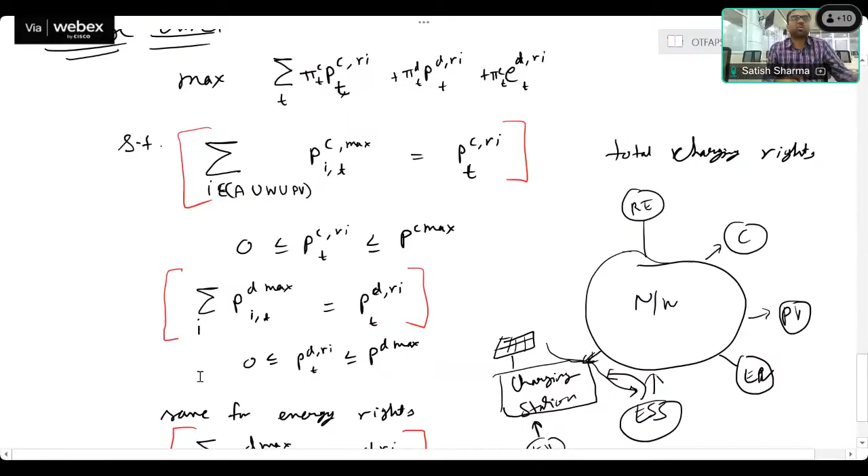how much rights he can acquire will be restricted by the physical capacity of the energy storage. Everyone is asking for certain rights, and the total rights he can provide are limited by the physical capacity of the storage, whether charging, discharging, or energy. So these three constraints are basically conflicting, coupling the objectives of the different players.

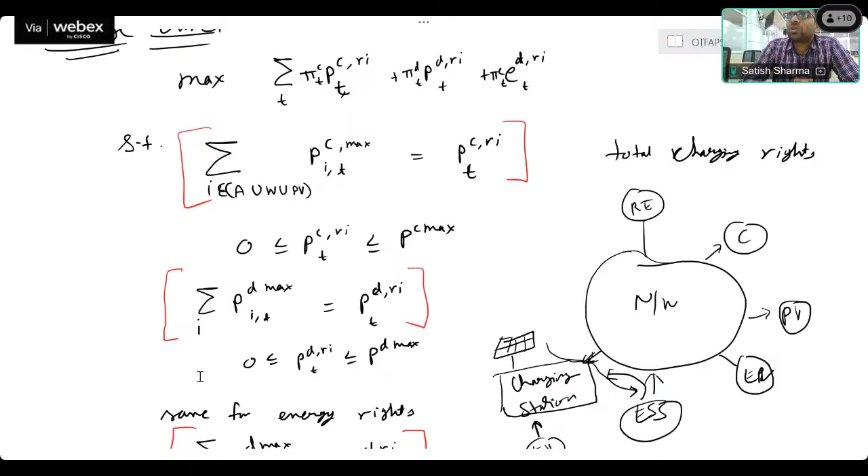And for this particular problem, we can again write down the KKT conditions which we studied earlier for each individual player, then merge all the KKT conditions and solve it. That is basically the Nash equilibrium outcome of the individual players. There are multiple players looking for their own objective function, and we can obtain the Nash equilibrium if we solve all of them together, which gives the point where everyone is happy.